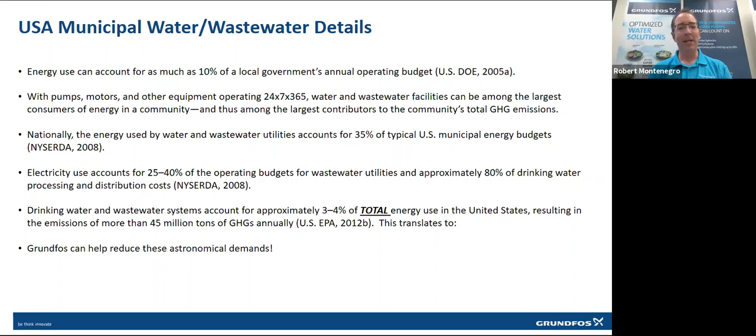Next slide, please. So if we think about a water boosting system, for those of us that rely on municipal water systems, the demand varies wildly throughout the day. Middle of the night, the demands are quite low, and then in the morning, showers and cooking and cleaning. In the evening, showers, cooking, cleaning, what have you. So there's a very, very wide range of needs of water and also of pressure for water. So it's important that water boosting systems have the ability to adapt to these wildly varying pressure systems.

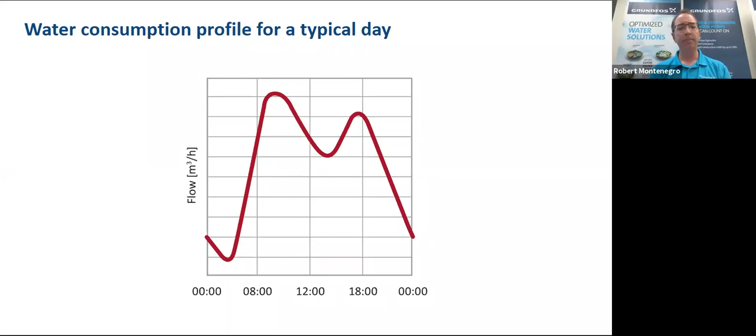Next slide, please. And depending on the location of where you are, each municipality, certainly state by state or region by region, the requirements for boosting systems vary dramatically. Many of these water boosting systems are old. They have very, very large pumps that run at constant speed generally, and they run 24/7 to make sure that the person at the far end of the line has pressure whenever they turn on their tap.

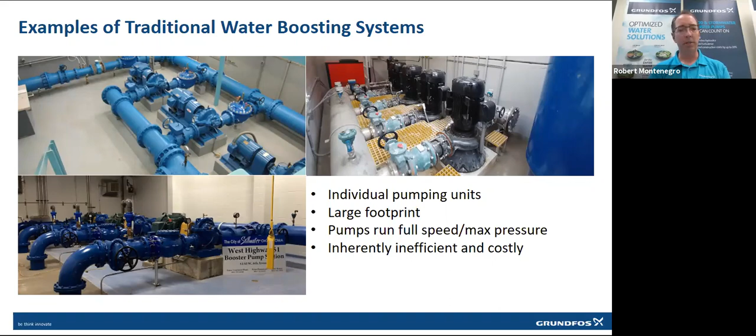These are inherently inefficient systems. And because of the fact that they're pumping so hard, and because of the fact that there are varying demands depending on the time of day, this also has dramatic impacts on the piping systems. So there are pipe bursts often associated with these sorts of systems. And again, just the footprint alone from some of these examples that you can see is rather dramatic. So next slide, please.

Also, by the way, they're importing 6 billion gallons of water a year. So they're importing 6 and losing 5. There's something wrong with that math, and it doesn't seem to make sense. So we've come and developed some solutions to help deal with these. Next slide, please.

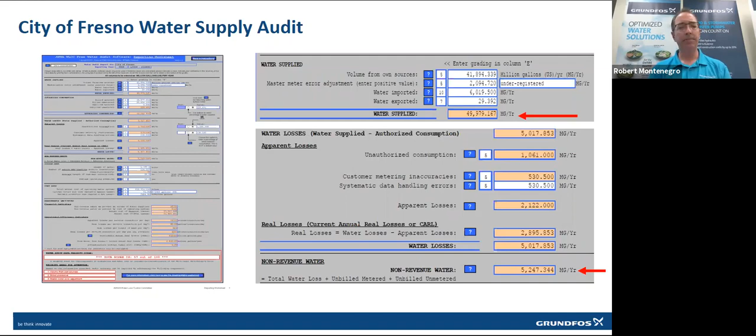Yeah, so the way that we've done this is with our DDD system, demand-driven distribution. By coming together with a system that will allow the boosting systems to operate on demand rather than 24/7, we know that we can save an awful lot of energy. We know that we can save on those pipe bursts, and we know that we can provide water and not have the non-revenue water. Next slide, please.

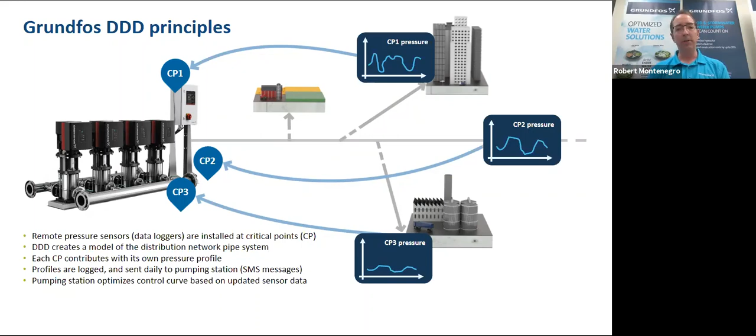And the way that the system works, it's rather simple and rather basic. We have a boosting system, which is shown on the left. And then we install pressure monitors at various critical points, CPs, critical points around the system. And those sensors will then feed information back to the boosting system, telling it how and when to run, at what volume it needs, and what pressure it needs to meet the demands throughout the system. Next slide, please.

And then the pumps are able to run with the number of pumps needed, at the speed needed, with the flow and pressure needed to deliver the right amount of water and pressure at each of the different critical points, including at the end of the line, which is normally one of those critical points. So when you turn on the tap at night, middle of the night, then water comes out the other end.

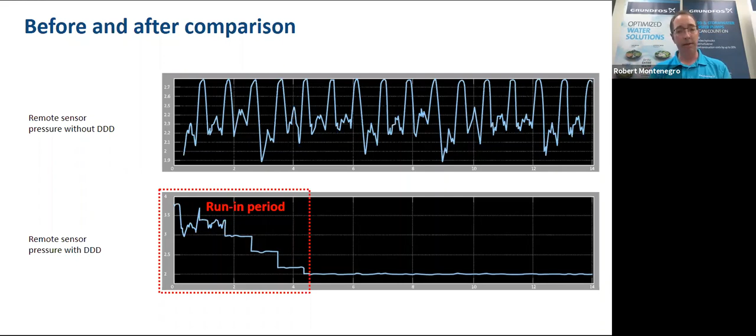And one of the real critical points about this when we talk about non-revenue water is that when you have these pressure spikes and flow spikes through the pipelines, this is where you see the most common occurrences of pipe breakages, leakages, and so on. And by leveling out that pressure, you dramatically reduce the amount of pressure spikes and therefore damages to piping systems. Next slide, please.

So what are some of the results that we achieved by utilizing this demand-driven distribution system? 25% leakage savings, 25 to 40% energy savings, and 35% reduction in pipe burst occasions. So these are really, really dramatic benefits and savings that you can get from utilizing this demand-driven distribution. And again, when we tie this back into a non-revenue water position, think about a 25% savings in leakage. We're talking about real results.

And I think that is my last slide. Are there questions from the studio audience?

There are. Thank you so much for that great presentation, Rob. I mean, I think you've really tied together so many of the goals that cities have around their water distribution systems and the connection that they also make to things like energy reduction, meeting our climate goals. I mean, this is really critical to figure out how to do this demand-driven distribution and help achieve these incredible impacts.

I think one of the questions is, is there a scale of deployment? When we think about utilities, there are many different sizes and kinds of operations. Is there a particular scale of deployment that is especially cost effective if you're considering the transition to this sort of DDD system, or is anyone able to get in and try this out?

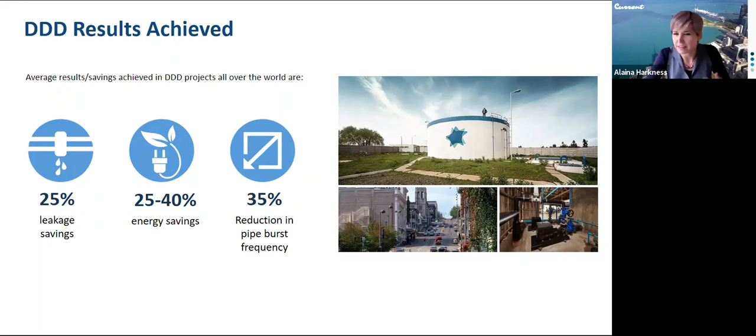Great. One more audience question. So do you have any indication that these kinds of systems can have impact on the pipes themselves, like less stress on the pipes, longer lasting pipes, anything about the kind of longevity of the critical infrastructure that you'd see as an impact? Yeah, fantastic question.

The better job the systems can do keeping pressure level rather than wildly fluctuating will have a dramatic impact on the life of the pipes, because you won't be putting that station or piping system through changes in pressure, which introduce air turbulence and other factors that will impact the piping scheme and reduce its life. So constant pressure is better.

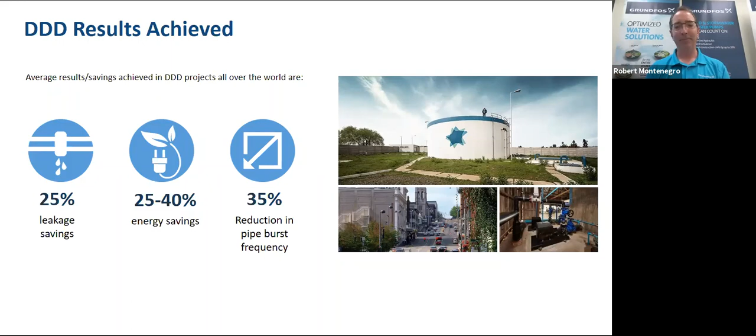Okay, great. I'm with American AVK Company. We've been in the US since 1985. AVK is an international company. We pride ourselves on providing solutions, not just products, and we're definitely not Mickey Mousing around.

We work with the WTA to provide free training to any utilities that are interested, in various forms including webinars. We have a very extensive online certified training program, and we also offer an AVK certified program at the factory, which includes factory tours.

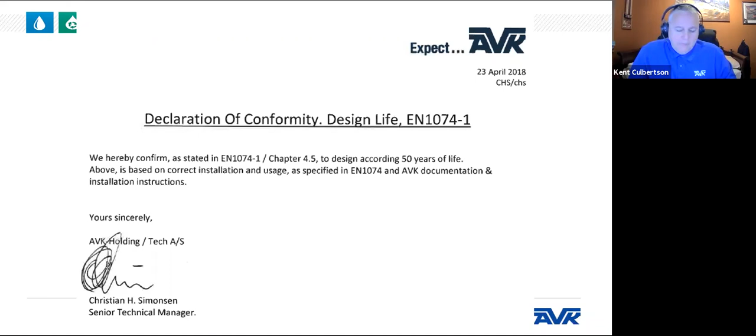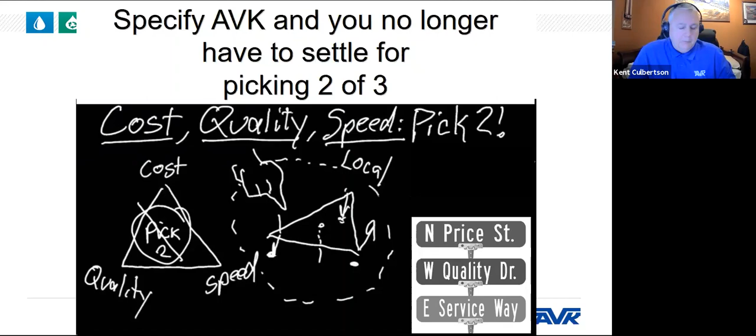AVK products are designed for a minimum useful life of 50 years, providing utilities with maximum return on investment. We've heard the old adage that with price, quality, and service you have to pick two. With AVK, that's no longer a factor. Every dollar you spend on AVK is maximum return on investment.

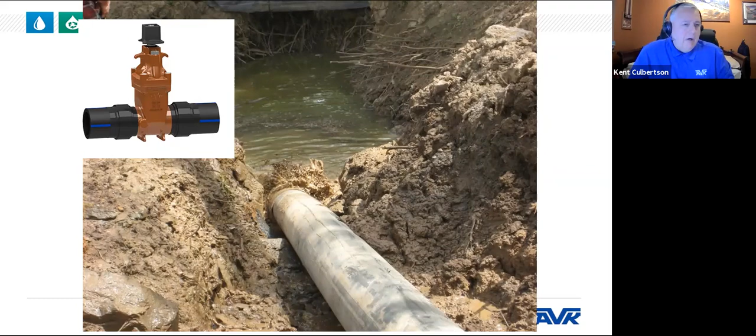One area we excel in is where HDPE pipe is involved. We have a fusible valve that fuses direct to the pipe, useful for river crossings, road bores, and similar situations where pressure from flooding or temperature shifts can occur. This prevents any damage at the joint since it's a joint-free system, and the valve on each side of the river would not break.

Can you just pause one second? HDPE pipe, could you define that for people newer to this conversation? High density polyethylene, where you either electrofusion or butt fuse weld the pipe. This allows you to fuse directly to that valve or to our fire hydrant or flush hydrant, making it a joint-free system. HDPE pipe initially had some issue with expansion coefficient, which we've overcome by not bolting it to the valve.

Road bores under streets and highways are another example. If the valve's in the easement on the road right-of-way, you're dealing with deflection and other variables, and the utility corridor can also be congested. By fusing that valve directly to the pipe, you eliminate many variables where you could have a failure point.

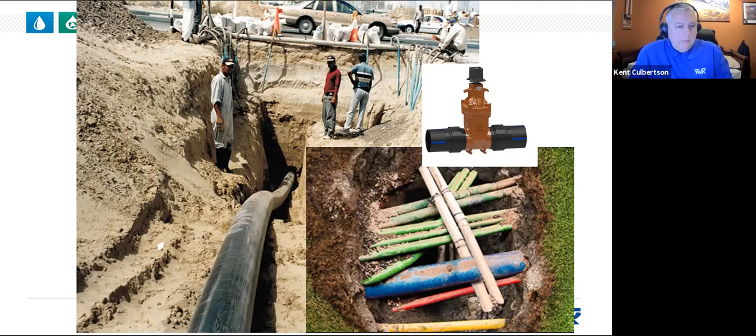Another area we've developed is the AVK HyMax Grip connection, which is a self-restrained joint. You can connect ductile to HDPE, ductile to PVC, or even IPS to DIPS OD pipe on each side of the valve, and it has a pretty good deflection capability built in.

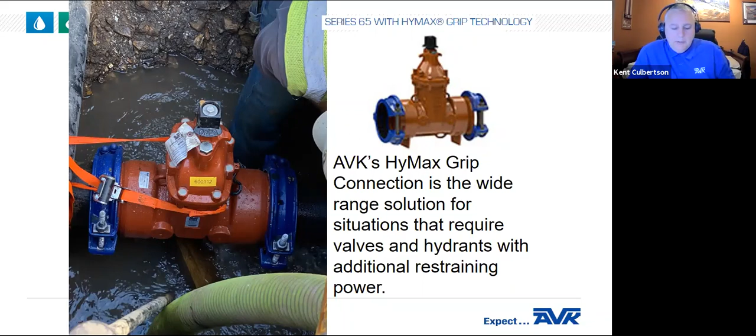Another issue we thrive in is bonnets on gate valves. You might not think this would be a factor for non-revenue water loss, but I've been on job sites and seen older valves with vice grips down in the vault holding the bonnet onto the valve. AVK Gummi is our own proprietary rubber company. The bonnet gasket is retained in the body not just by the bolt, but by the way the valve is designed, preventing the gasket from extruding out and the valve leaking undetected.

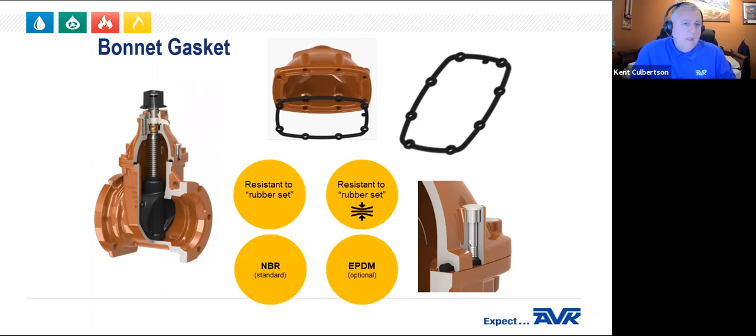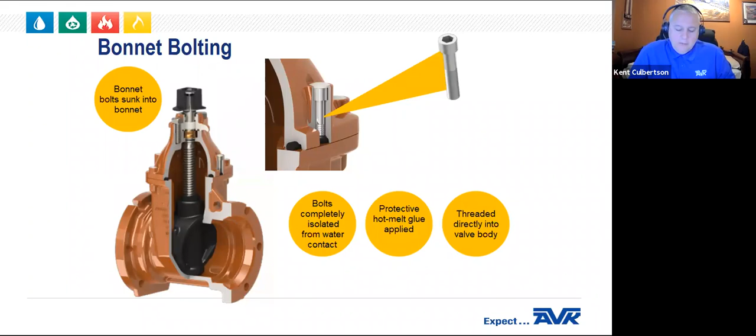Along with that, we spend an extensive amount of time testing our bonnet bolts. When you think about non-revenue water loss, one thing you might not consider is valve failure, but we've tried to address this and prevent leakage at the bonnet.

We actually test every gate valve at 30 PSI, 250, and also 500 PSI at the factory, with 100% traceability. To pass the 500 PSI test, there can be no leakage through the valve shell or the sealed surface.

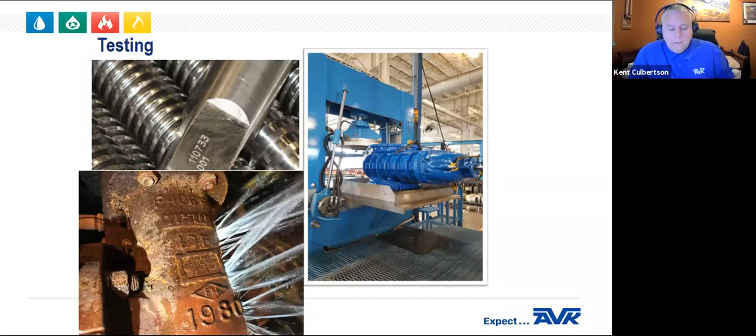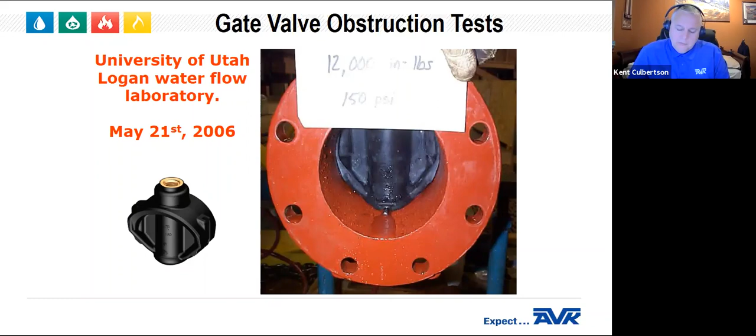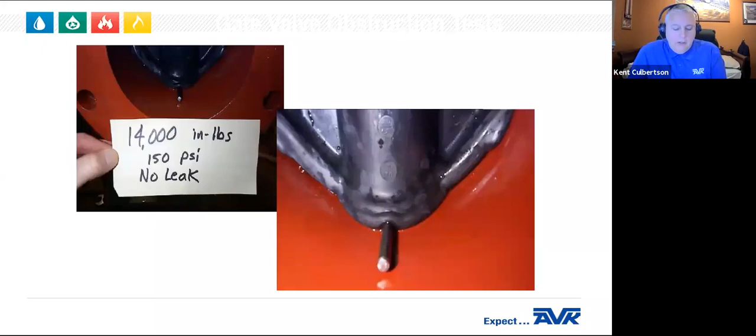We actually do obstruction tests with quarter-inch steel rods. At 1,000 foot-pounds of torque and 150 PSI of water pressure, it was leaking about half a tablespoon every 2.5 minutes, which is 6 ounces per hour. But at 1,167 foot-pounds of torque on the valve stem, the valve was actually drip tight.

What was more impressive was we were able to remove the quarter-inch dowel rod, and with just 30 foot-pounds of torque on the valve, the wedge was drip tight also. So if you're trying to isolate a valve and dewater a trench with a lot of groundwater involved, this prevents the valve from leaking and reduces water loss.

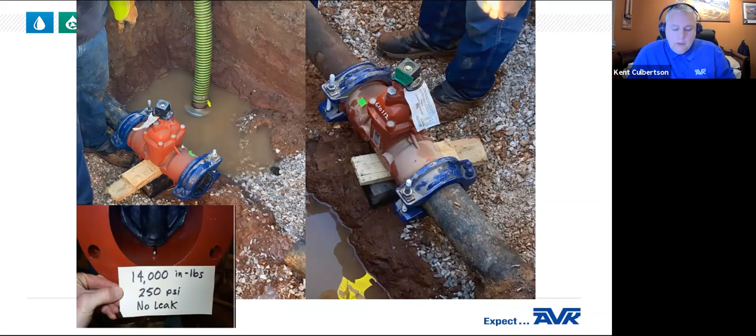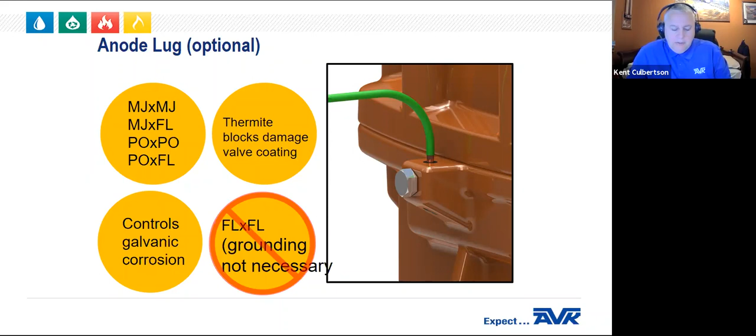Corrosion is also a huge issue with appurtenances, especially with the increased use of PVC and HDPE pipe. The corrosion follows the path of least resistance. So cathodic protection is increasingly used for fittings, and rather than thermite weld the anode lugs onto the valve or fire hydrant, we have an anode lug, and you can hook two 10-gauge wires directly to the valve.

We've worked with multiple companies to develop butterfly valves, including some AVK sister companies overseas. Butterfly valves are often used because they're cheaper than a gate valve, but one issue is they traditionally have often leaked. We've developed the AVK Series 816, a butterfly valve that will not leak. It also allows HDPE pipe to be inserted into the butterfly valve without beveling the pipe.

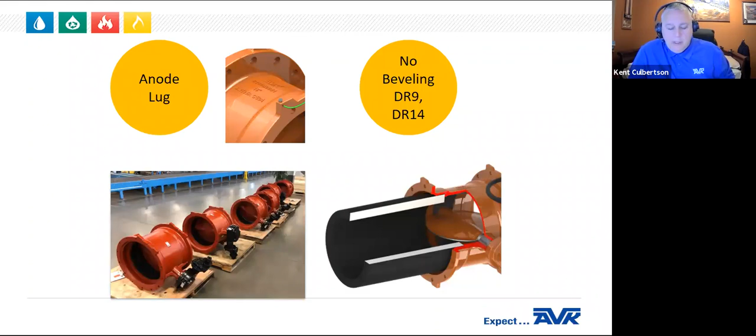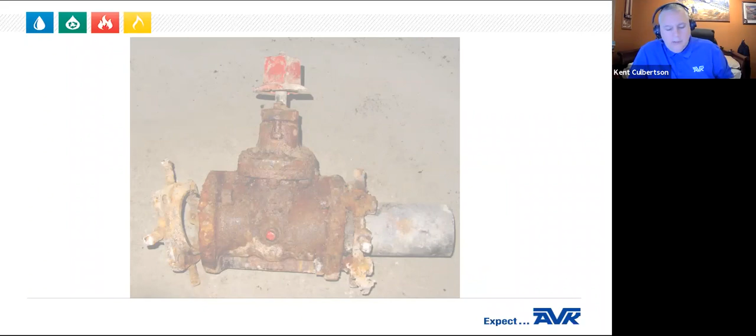We spend an enormous amount of time on corrosion, trying to prevent corrosion and deterioration of the valve bodies. That includes what we call a holiday-free coating as an option on the interior of the valve. If you have any questions about that, get a hold of us later and we can talk more. We also offer a polyurethane exterior coating.

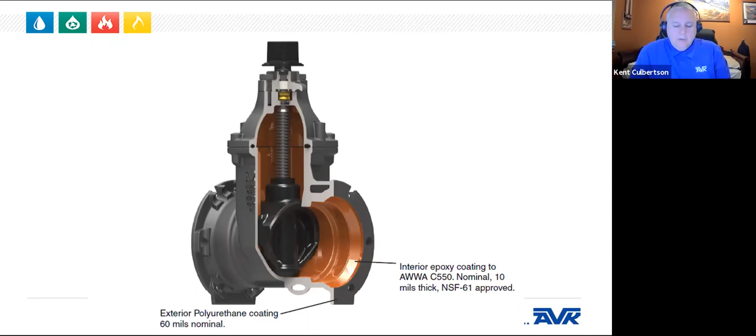It can be up to 120 mils thick, sprayed over the outside of the valve over the epoxy. Basically, think of it like rhino lining on a pickup bed. Instead of wrapping the valve, if you've got a ductile iron main, wrapping it with poly, you can just have them shipped from the factory with PUR coating. Here's an example of a good application for the PUR coating.

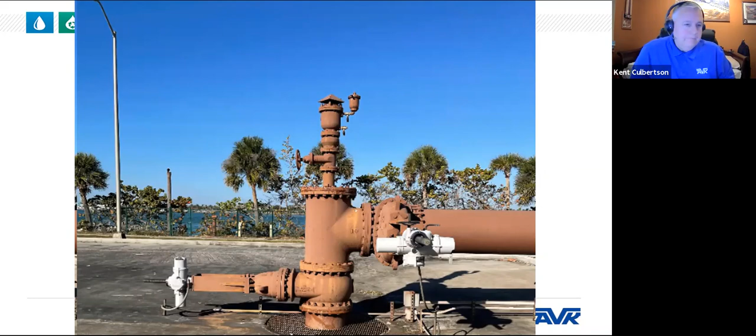This was in Florida, and these are older valves being pulled out. The sea spray deteriorated the valves after a few years, and with the polyurethane coating, you don't have to worry about that. We're also very focused on fire hydrant coatings.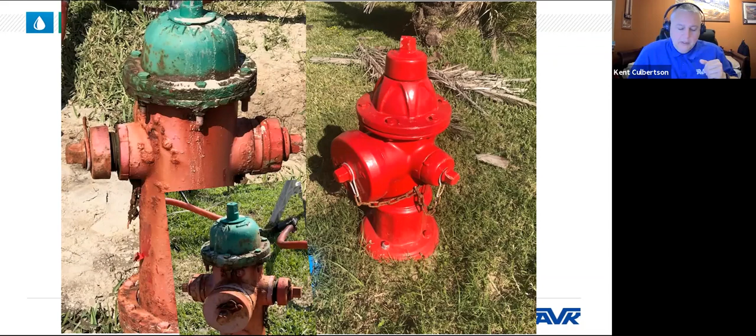You wouldn't think about that as far as non-revenue water loss, but as the hydrant rusts, if it's in a highly corrosive environment, you can have leaks due to bolts and whatnot. Here's an example of a hydrant on the right, an AVK that was put in as a test, and after a year, there's negligible corrosion.

One thing most utilities are very familiar with is the fire hydrant main valve leaking. AVK again has an incredible main valve for the AVK fire hydrant, and it's so good that we have a 25-year warranty on it.

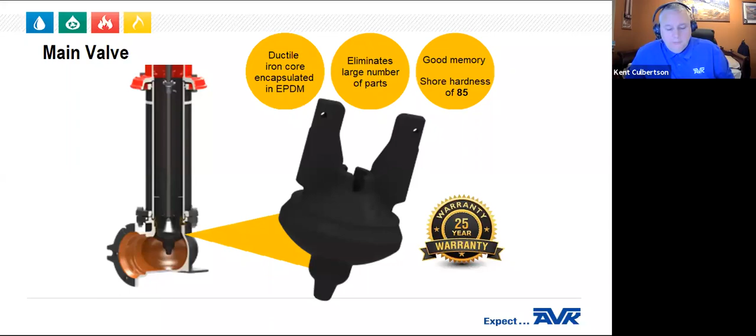Probably in the movies, when fire hydrants are hit by a car, they spray. With a dry barrel hydrant, that really doesn't occur, but with a wet barrel hydrant, they can actually leak up to 8,000 gallons a minute if hit by a car. It takes an average utility about 40 minutes to mobilize and get their crew on site to shut the hydrant down and repair it. At 8,000 gallons a minute, that could be about 320,000 gallons of unmetered water lost.

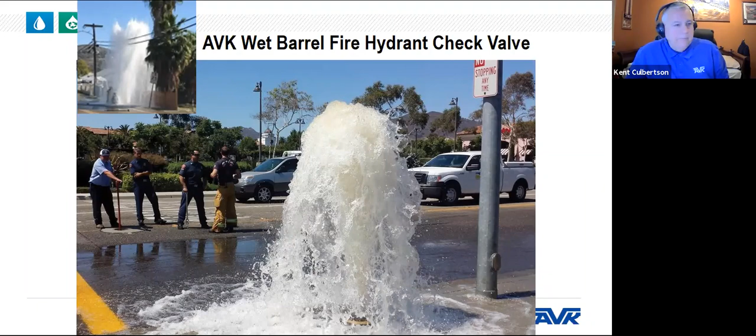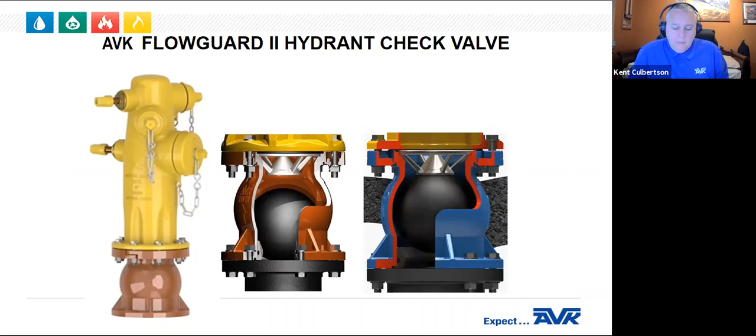So AVK developed what's called the FlowGuard 2 hydrant check. This basically prevents the hydrant from leaking if it's a wet barrel hit by a car, especially in a warmer climate. The great thing about this is it will fit any manufacturer's wet barrel hydrant. When the hydrant's closed, the ball will settle and seal in a reverse direction. It also prevents backflow or cross contamination.

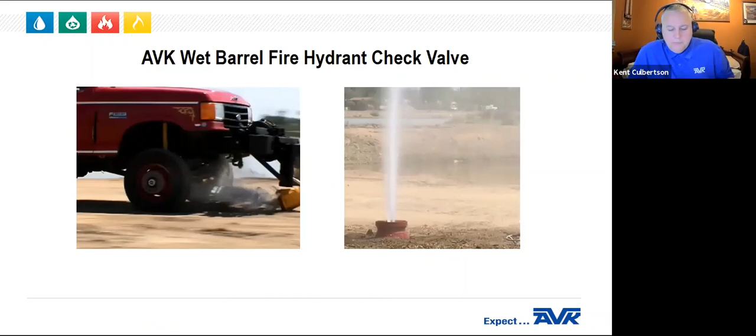Another thing we assist with is working with smaller utilities on flushing programs. Annual flushing is very important, but unidirectional flushing can reduce non-revenue water loss by about 40%, because a lot of utilities don't meter their water when flushing.

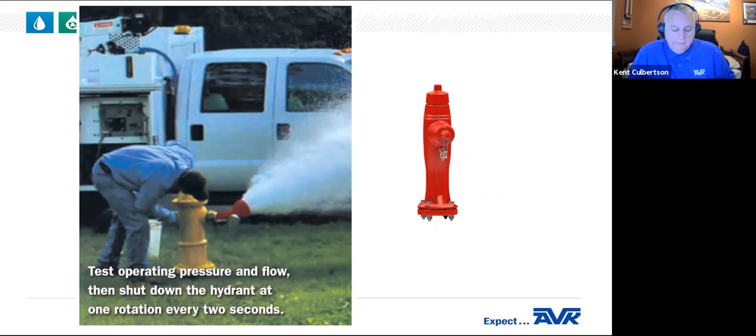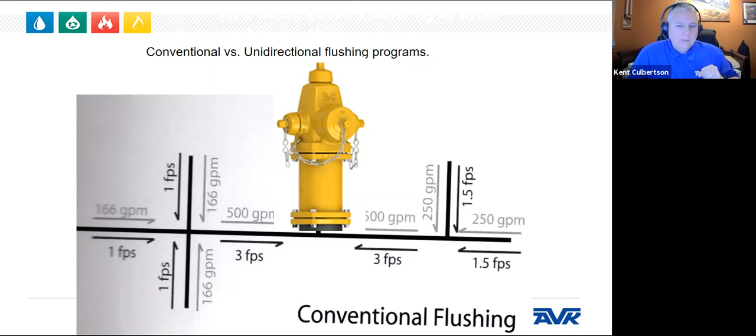Conventional flushing of fire hydrants basically involves no plan. Utilities often just get out there and randomly flush hydrants as they get the opportunity. So we encourage unidirectional flushing, and if you have a plan, you can actually reduce water loss by about 40%.

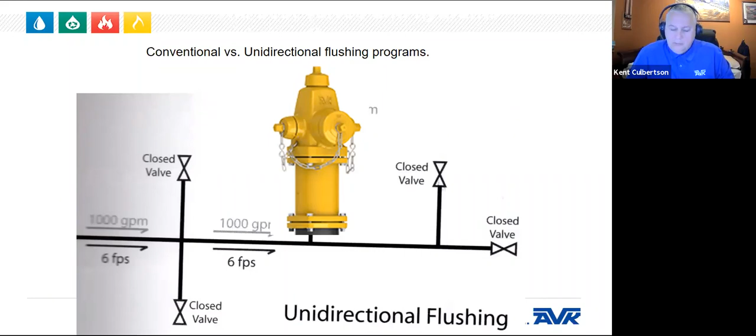Another thing we've tried to do, as some people mentioned earlier, is rethink the way we do business due to COVID. So we came up with an app called AVK Field Assist. Basically, think of FaceTime—AVK Field Assist is very similar. It allows you to share your screen while the operator for the utility is on site.

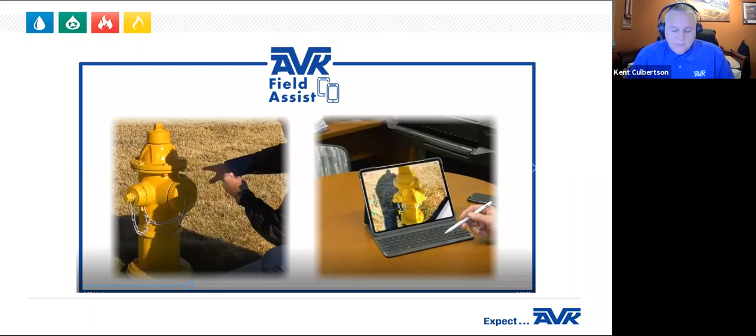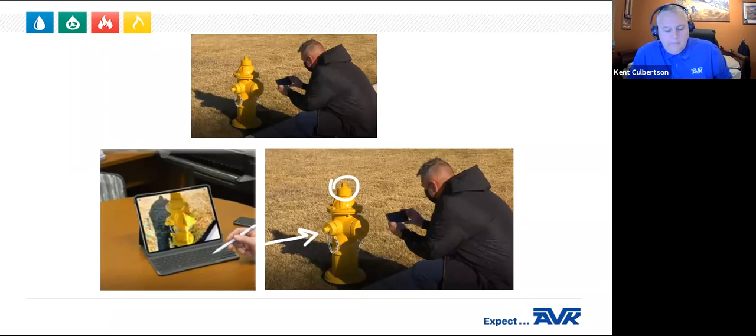Basically, they just download an app called Vuforia Chalk. They'll then receive a code from an AVK engineer, and what this does is it actually allows us to use augmented reality. You can share your screen, or your operator can, on site, and then our engineers will mark on their screen and show them what areas they need to work on. The goal is to address leaks quickly. Historically, we would have to mobilize somebody, sometimes drive or fly to a job site to try to help fix a check valve, fire hydrant, or leaking gate valve. We can actually do it online now with this app.

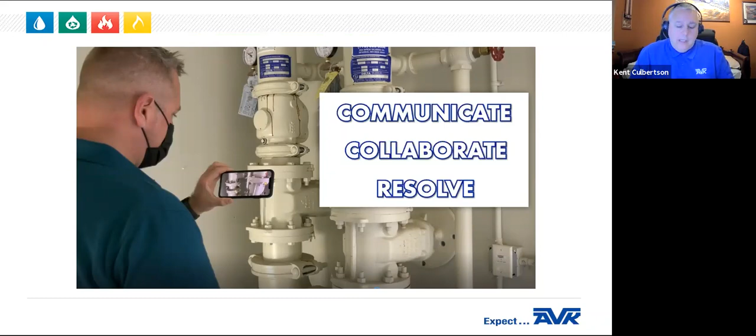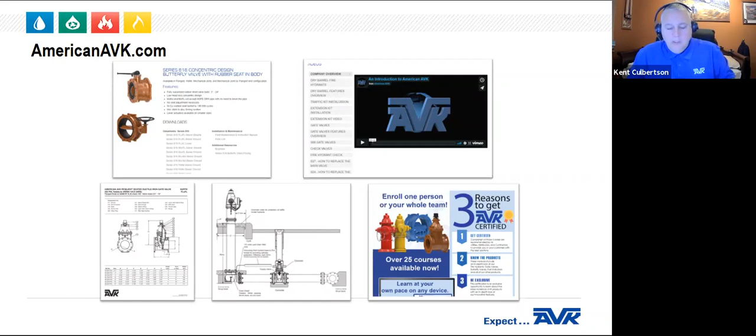So again, to wrap this up, non-revenue water loss is something that we're focused on. We realize valves and hydrants are things that you may not think about very often, but we encourage you to go to our website, we have a lot of resources there. And again, the free training, we have over 25 courses available at no charge. If you have any questions, here's my contact information. And with that, I'll turn it back over to you guys.

Thanks, Kent. Just a couple questions if you can answer maybe succinctly, because I want to keep us moving here. There were questions about how different soil conditions, regional weather, and chlorine treatment impact valves. I guess the broader question - you mentioned the Florida installation you're doing - what are some of the regional conditions and variances people would want to have in mind as they're thinking about making this switch?

I actually was on a podcast yesterday with Michael Rosenberg-Peterson, and we were talking about that a little bit. The interesting thing about the United States, North America in general, is it's such a large geographic region, and you have areas that vary wildly from one market to another - soil conditions, the way they treat water, all sorts of different variables. So I'll just say, if you have a situation where you have highly corrosive water impacting your valves or fire hydrants, get a hold of us, and we almost always have a solution to the problem.

Great. And then you mentioned this 50-year lifespan for the products. Do you have a sense of how long the average municipality keeps valves in place before replacing them? I know there's a lot of deferred legacy maintenance that needs to happen and replacement. Do you have a sense for that?

So I just wanted to share a couple examples of two utilities who have used this ALD technology to find leaks within their water system. The first one is Crystal Clear Special Utility District. They're located just between San Antonio and Austin, Texas, and they started this program mid last year. This utility started decades ago. It was a bunch of farmers and ranchers that had to get water to their cattle. And today they have over 6,000 service connections. They supply over 1.8 million gallons per day. And they have very rocky terrain, so typically the leaks don't surface until they become a bigger problem, leaks or bursts.

But 2 months into the project, they noticed this leak right here. And as you can see in the graph, the noise level gradually rose and the meter on the blue line had a leak about a foot from the meter box. And this was a pretty significant leak. It was leaking at over 1,000 gallons per day. And you can see there were a couple meters nearby that also picked up the same noise trend. So this is how they can correlate that there is something that all these meters are hearing in the area. And just the way this meter was piped, they said that it helped them find a leak that they would have not known to look for.

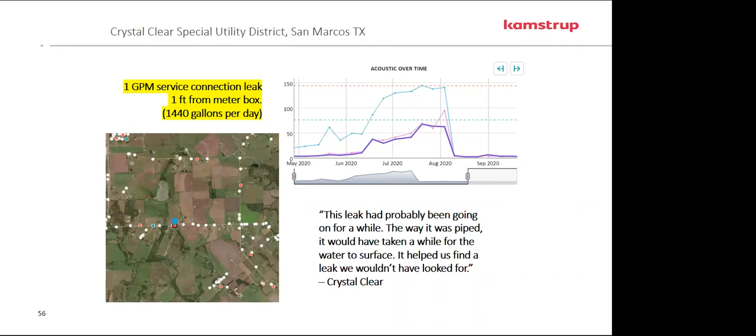Second example here is Ephrata Area Joint Authority. They're just an hour west of Philadelphia. And again, they started this project with us last year, and they noticed a huge spike in the noise level on this particular meter. And they went out with their ground correlators and they were able to pinpoint where the leak was. It was on a 12-inch main, leaking from a stainless steel clamp about 55 feet from where the copper service line was. So again, this is an example of a leak that they wouldn't have found until the situation got much worse.

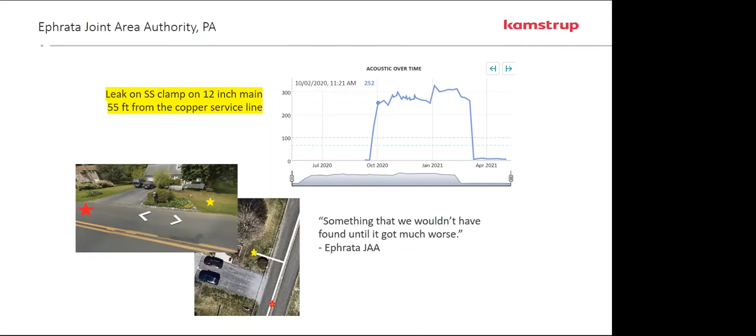Okay, that's great, Karen, because there's a lot of questions. So I'm going to go ahead and jump in here. Just from a technical perspective, an audience member's curious how you differentiate leaks from just normal usage with this acoustic approach.

That's great. So the meter actually takes 26 short measurements a day, and we do that to filter out background noise. And also if there's flow in the meter, so if someone's using water in the household, it postpones that measurement. But however, if there's a constant leak on the customer side, we also display a leak flag in the software so they can tell, well, this noise may be attributed to a customer side leak.

Great. And how far out in the distribution system are you able to detect leaks? Is there a threshold there? That's a great question that we always get asked all the time. So there's no set distance, and it all depends because it depends on how noisy the leak is. So if there's noise in the pipe, then it's going to pick it up. However, if there's no noise in the pipe, then it's not going to pick it up. And that's like this leak detection world, it just follows those same rules.

But we have had cases where it was picking up up to 500 feet. Now that's like an extreme example. And then we've had leaks that were within 6 feet away and it couldn't pick it up. And we had various differences in pipe material, metal versus plastic, and so forth.

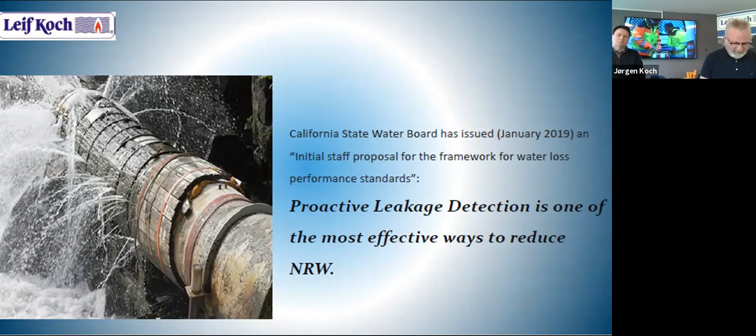I'm going to talk about proactive leakage detection, and we will come across some systems, but mainly about the way to do it. Please, next slide. Thank you. What you see here on the slides is part of our training facility, where we do the training of staff from around the world here in Denmark. We also do training abroad, everywhere in the world.

And I'll say that the general idea with proactive leakage detection is to have the master plan, so to speak, to find out what methods are the most comprehensible in each area. I'll come back to that later. Next slide, please.

As I mentioned, the master plan, what to do, how to do, to maintain the plan, there's a variation of systems which we heard about, just Kamstrup's noise logger inside the meter. That's a really good idea. And you can also place loggers outside in the system, and that could be a good idea depending on the material. We also use correlators and ground mics as stated.

So where we start is taking the master plan of what is the job, what is the situation, what is the goal? If we see here in Denmark, as it was in the opening speech, very, very fine, stipulated, 25 years ago, we had a consumption of about 60 gallons a day a person. 25 years later, we have halved the consumption. This is not directly by leakage detection, but it's also by leakage detection. But in the same period, the leakage percentages went down from about 15-20% to below 7% losses.

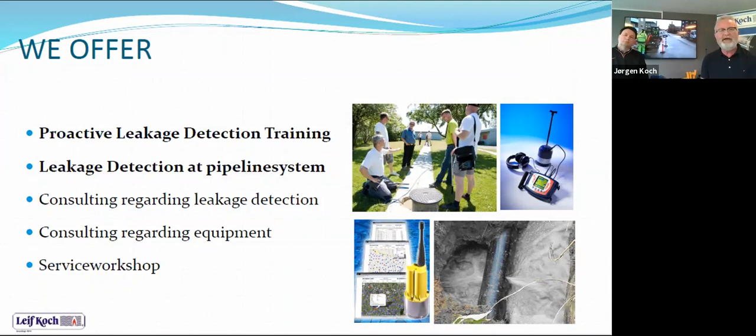After developing the master plan, it's training to find out which kind of equipment system is comprehensible in the different areas. There's a lot of variations of systems, and you're very welcome to ask about the single ones. I will not go deep into the techniques. That will be in the next slide. Next slide, please.

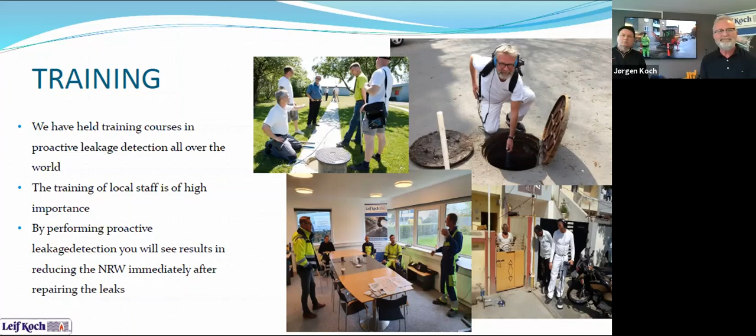This is terrific. So the first question: right behind you, you've got the Sustainable Development Goals up on the screen. That's a really nice feature there. So when you're talking to cities about the value of doing leak detection, what are some of the things that you highlight in addition to the cost savings? Because, with the Sustainable Development Goals up there, obviously climate resilience and many other things are achieved by making these investments. How do you talk about the

value? We start to find out what is the situation. Are you purchasing water? It's one price. The resources, you cannot price the resources. If you don't have more water, you'll have to do desalination or something else, very costly or extremely costly if you have to turn the way of the water. So we start to find out what is the impact of the leakage compared to both the finance, of course, and the resources.

And then we calculate back to see where are you? Do we have a loss of 5, 10, 15, 20%? And where is it possible to go? And then we will recommend to use other systems as well. We focus on the leakage. So it's very varied. Some places the last drop of water costs the same as 10,000 gallons of the first one. So the value both in resources and finances is very varied.